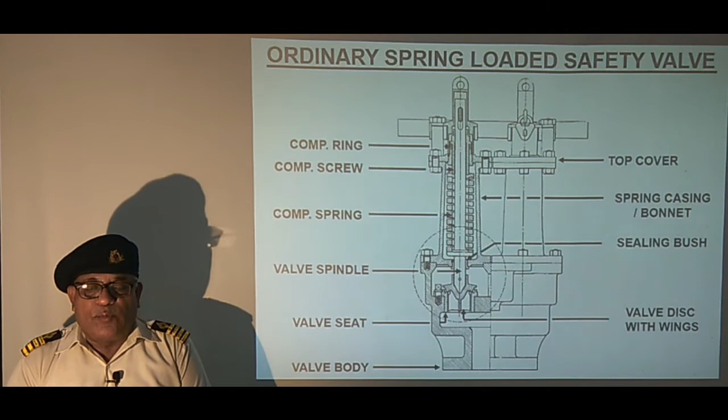A compression ring in two parts is fitted between the gap of bush and the compression screw, which prevents loosening of the screw due to vibration.

Spindle hood is fitted after setting the pressure. A cotter is passed through the oval slot provided in the spindle and hood, which is connected to the easing gear.

Easing gear is used to lift the valve manually in case it does not open under steam pressure. Excess steam enters from the bottom and is led to the funnel through the exhaust pipe, which is shown over here.

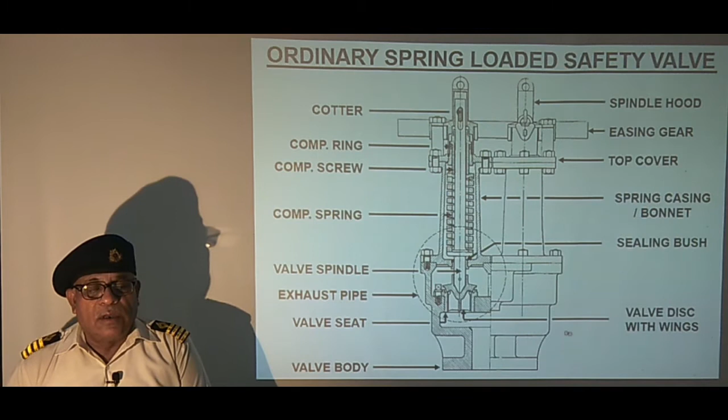This design had the problem of valve seizure due to wings provided for guiding the valve movement, which are shown over here.

The sketch shows the construction of high lift safety valve, which is the first modification of the ordinary spring-loaded safety valve. Let's see the changes carried out in this safety valve.

Wings of the valve disc have been removed, which cause seizure of the valve in the ordinary spring-loaded safety valve.

Sealing bush has been replaced with a guide plate, which guides the spindle and also allows steam to act under the lower spring carrier through the steam ports provided for this purpose.

Guide plate is provided with a drain hole for removal of condensate.

Lower spring carrier has been modified to act as a piston on which steam exerts upward force to relieve spring force. A vent is provided for escape of steam from the spring housing.

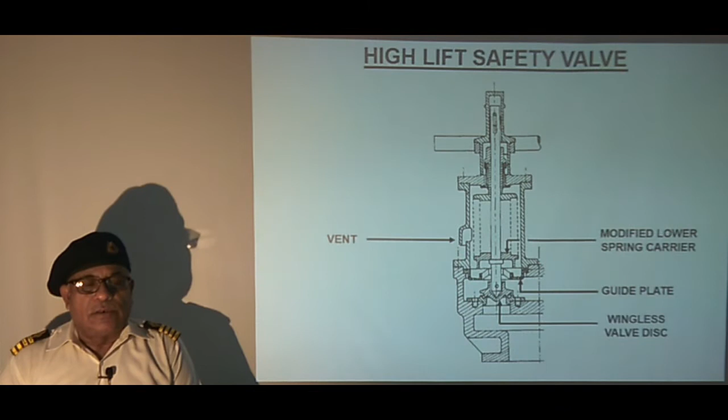This design has a trouble known as feathering effect, due to which the valve does not close with a snap action and results in leakage. This sketch shows further modification to the high lift safety valve, known as the improved high lift safety valve, which removes the drawback caused by feathering effect.

A loose or floating ring is provided between the guide plate and lower spring carrier, which prevents excessive steam leakage in the spring housing. The ring is kept floating or loose to prevent seizure of the valve due to corrosion between the ring and the lower spring carrier, and the valve can lift together with the ring.

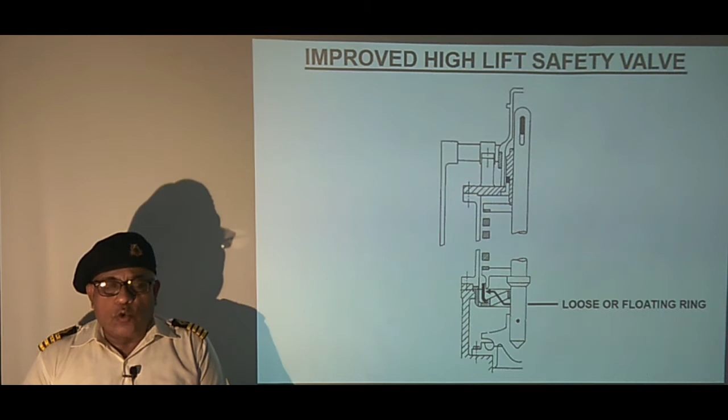This sketch shows the detail of the valve. You can see the valve body to which the valve seat is secured.

Then we have a valve guide, and there is a loose ring which is sealing the steam between the lower spring carrier.

The valve spindle is passed through this and is attached to the valve disc. The spindle is attached to the disc with the help of a pin for securing it.

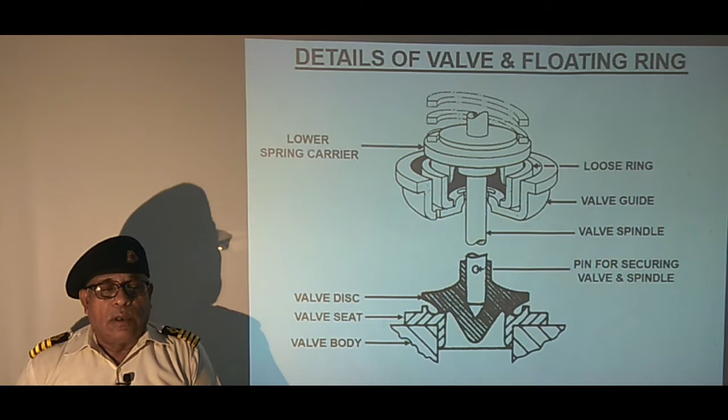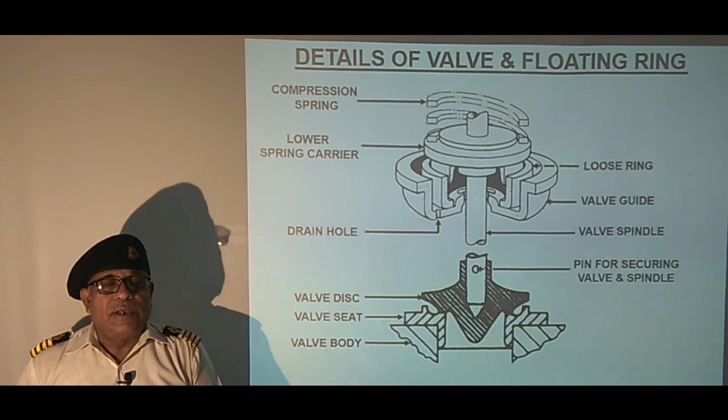The lower spring carrier acts as a steam piston on which the spring is kept and compressed with the compression screw, and at the bottom of the valve guide there is a drain hole to remove the condensate.

This sketch shows the first and second stage of valve operation as described below. The seat is secured to the valve body on which the disc rests, as shown here.

Bottom of the valve disc has a special shape to guide the steam towards the seat, as you can see here.

Similarly, the seat also has a special shape to deflect the steam towards the valve lip when the valve lifts a little, which is shown here. This is the valve lip.

The valve usually remains seated under the force of the spring. When the steam force acting under the valve disc exceeds the spring force, the valve lifts a little, which is the first stage of valve operation.

At this stage, the valve cannot open further because the initial valve lift compresses the spring further, which will require more steam pressure to lift the valve further.

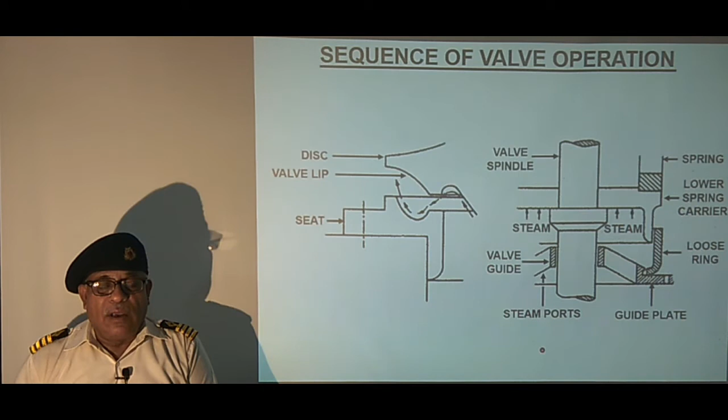We can see here the steam passes through the port and acts underneath, and the spring force will be completely removed.

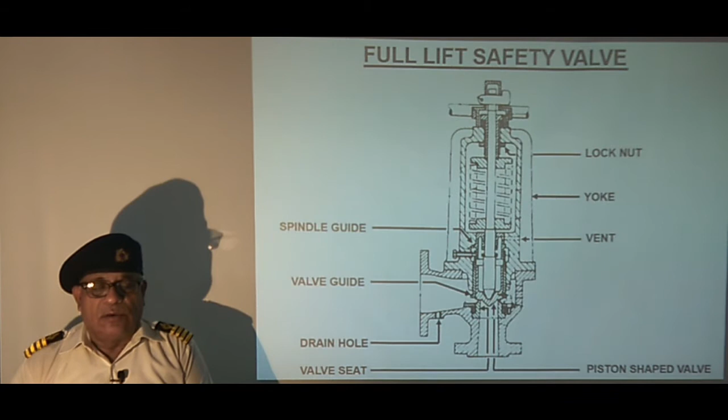This valve also opens in 3 stages. In the first stage, when steam force exceeds the spring force, the valve lifts a little. In the second stage, the escaped steam acts on the lip of the valve, thereby exerting more force to lift the valve further until the bottom face of the valve enters the valve guide.

In the third stage, the escaping steam is deflected downwards by the bottom edge of the guide, and the consequent reaction pressure lifts the valve to the full open position. So that is the difference: in the third stage, the reaction of the steam is utilized to open it fully, whereas in earlier cases, steam was used to lift and overcome the spring force.

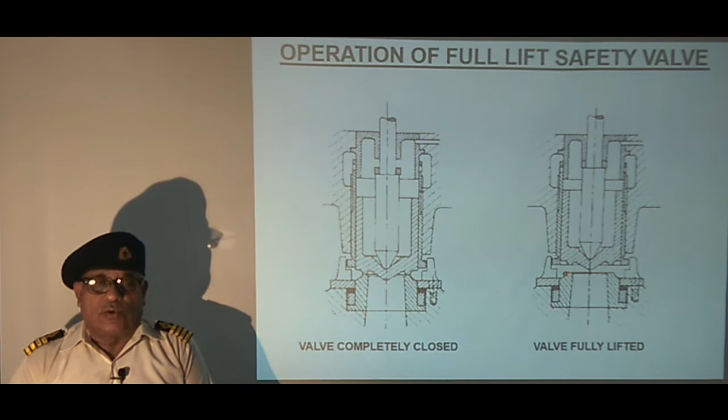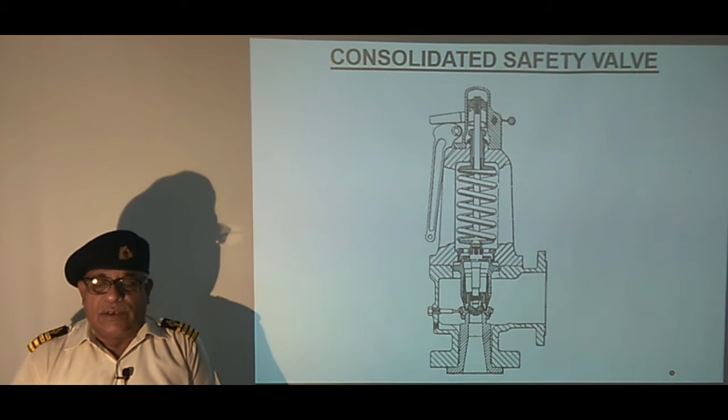This sketch shows a consolidated safety valve designed for pressure up to 62 bar and temperature of 537 degree centigrade. This safety valve includes three special features: adjustable blowdown control, precision closing control, and thermodisc valve seat, which are discussed in the following slides.

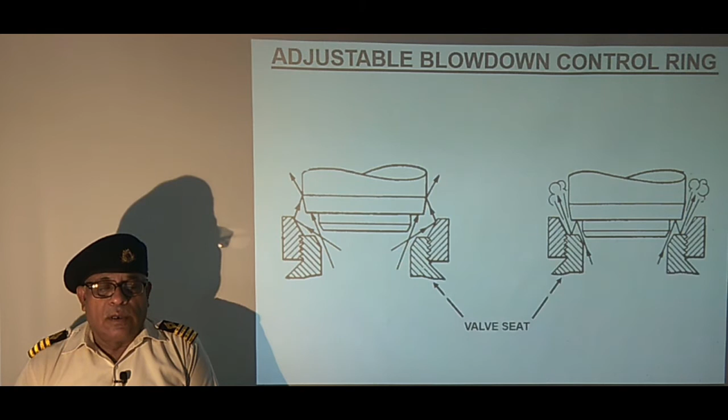So we can see this here. The two positions are shown: one is valve opening on the left side, and on the right side valve closing. The valve seat has got an adjustable blowdown control ring, which is adjusting the steam in such a way to provide quick lift while opening and a cushioned closing.

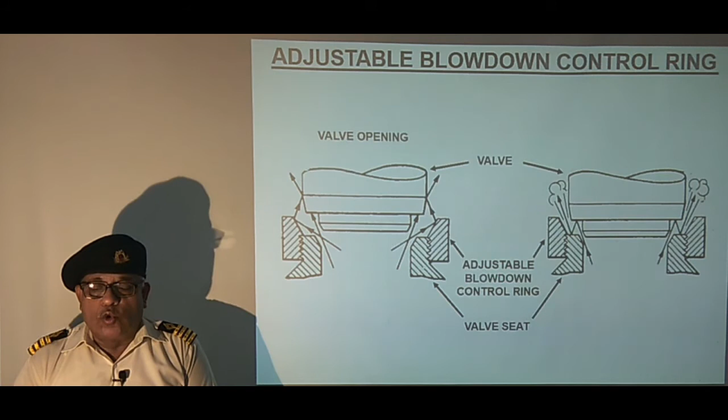And that is the valve. In the opening position, during the valve opening, exhaust steam escaping from the valve provides additional reaction due to which the valve opens rapidly. We can see this additional reaction which is coming on the side of the valve.

And in the valve closing condition, when the valve is closing rapidly under the influence of the boost cylinder, the escaping exhaust steam provides a cushioning effect due to which the valve is seated gradually. During the closing condition, there is no reaction of the steam, and it is the steam trapped here that provides the cushioning effect so that the closing is slow.

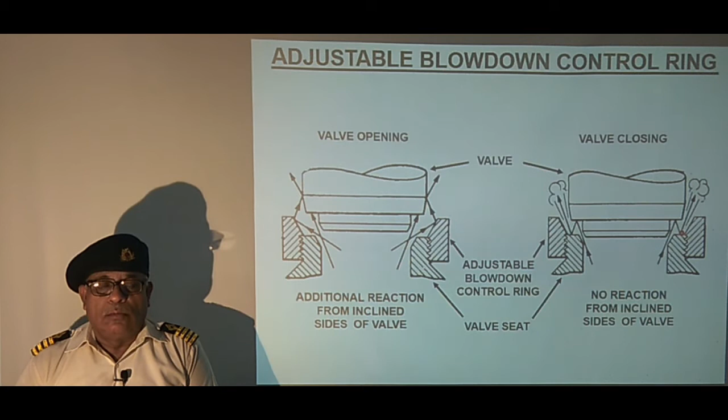As the boiler pressure falls and the valve begins to close, the piston ring closes the atmospheric vent, which causes a sharp rise in steam pressure in the boost cylinder. The resulting down thrust on the valve disc produces a positive closing action and gives the desired snap shut, which also prevents the feathering effect caused by the escaping steam.

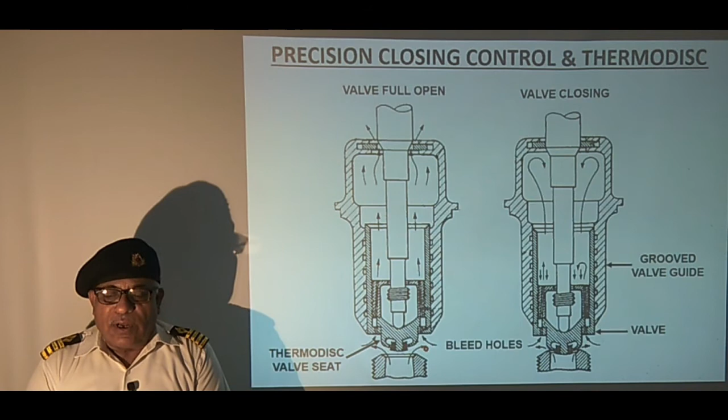The waste steam is going from the outlet side, led through the funnel to the outside. In the relay valve, which is a two-position valve, there is an atmospheric vent and a condensate drain hole. To operate the valve in an emergency, when it does not open under steam pressure, an easing gear is provided.

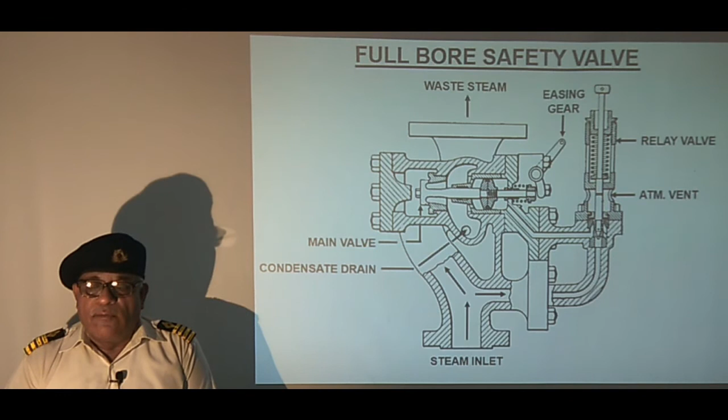The valve lift in this case is equal to the nominal bore D, as compared to D by 4 in other types of safety valves, and provides 4 times the discharge capacity compared to a high lift safety valve.

As compared to other types of safety valves, the main valve is not operated directly by steam pressure but is activated by its own control valve, both of which are in direct communication with the steam drum or superheater header where they are mounted.

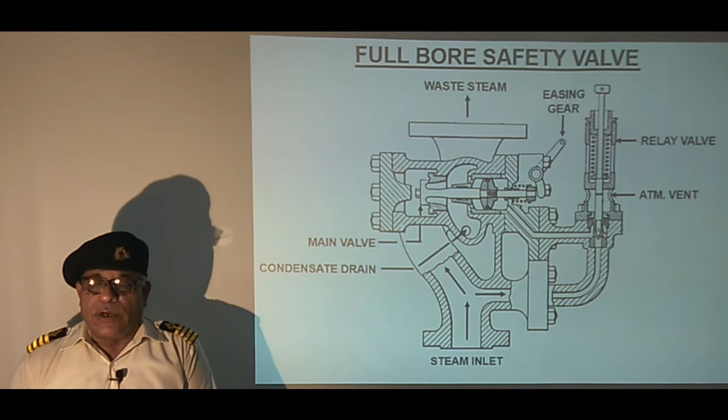This sketch describes the operation of the valve in a simple way. Let's see the valve components first.

So we can see the valve spindle to which the main valve is attached. The control piston is used to operate the valve, and the return spring is there to close it as the valve is closed by steam. So this will bring it back when the steam that opens the control piston stops.

The easing gear is used for valve operation when it does not open with steam. The stopper will limit the opening of the valve to the extent of D. The steam inlet is there on both sides, the main valve as well as the relay valve.

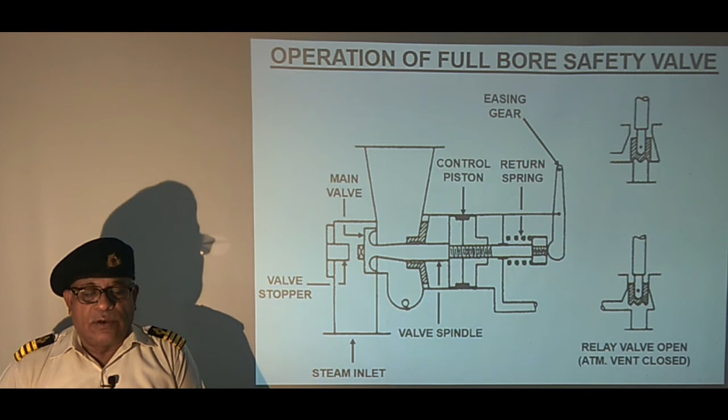So now it is shown that the relay valve is opened, which has closed the atmospheric vent. So when it opens, the steam will move to the right side of the piston, and when the valve lifts, the waste steam will go out from here.

In the second position, the relay valve is shown closed. So the right side steam is vented to the atmosphere.

During normal boiler operation, both main and relay valves are in contact with steam. The relay valve opens directly with steam pressure, whereas steam keeps the main valve closed. The relay valve is a double ported valve and usually remains seated by the spring force, thus venting the control cylinder.

When steam pressure exceeds the set pressure of the relay valve, it closes the vent and admits steam to the control cylinder.

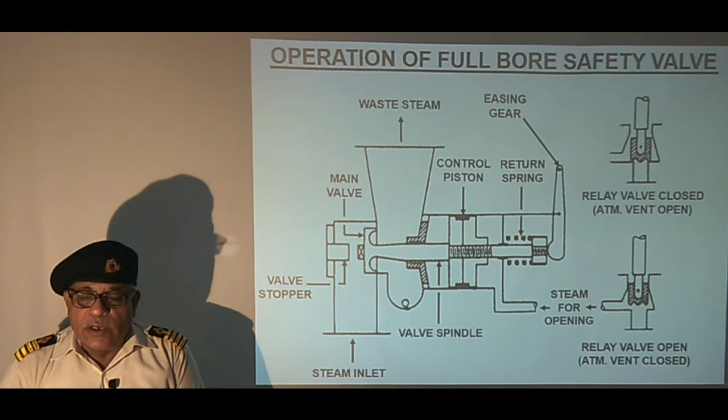As the area of the control piston is double that of the main valve, steam force acting on the control piston overcomes the combined force of steam on the main valve and the spring force, thereby opening the main valve fully up to the valve stopper, and steam is exhausted through the waste pipe. When steam pressure drops, the relay valve sits back and vents the steam acting on the control piston, and the main valve thus closes. This completes our study of the construction and operation of different types of safety valves.